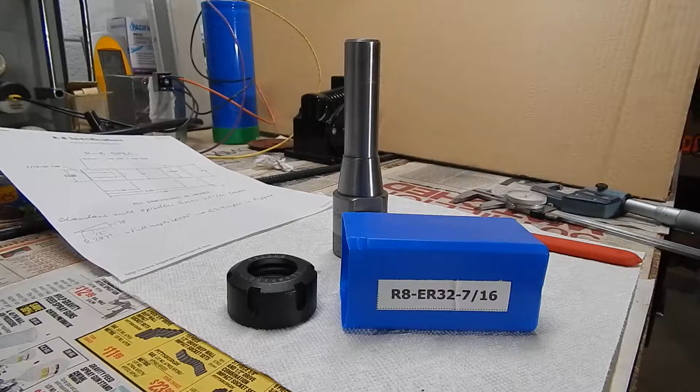Hello, this is a review of the Banggood ER32 collet holder with R8 shank. This is the package of it. 7/16 thread for the drawbar.

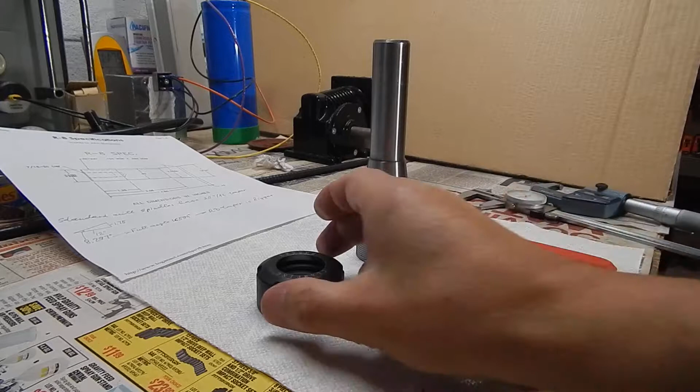The package included the holder itself, the nut, and a tightening wrench. There is nothing wrong with the wrench, it's pretty good. But let's talk about the collet and the nut. This is the collet holder and the nut itself.

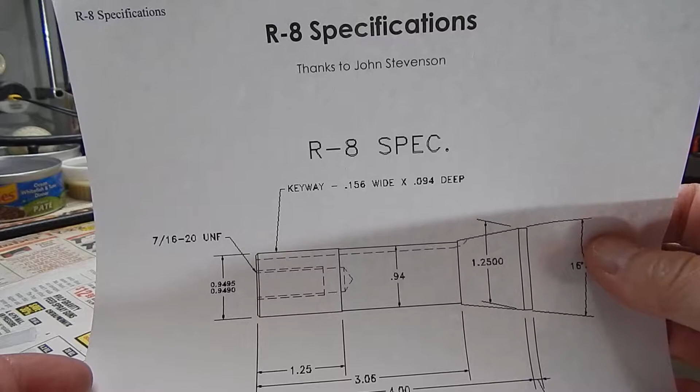There are a few specs which everybody is supposed to obey with. In this case, this is R8 specification for the shank itself. Let's check a few parameters in here. Very important one is the rear shank, which is supposed to be 0.9495 inches to 0.949 inches in diameter. Manufacturer spec gives only 0.0005 of an inch tolerance for this journal.

Let's see what we got. We're gonna use a Mitutoyo digital micrometer for this test. I'm gonna set it on 0 so you can see that the micrometer is set properly.

Okay, it's 0.5 off. Changes with temperature. Let's set it on 0 again. Okay, now it's 0.

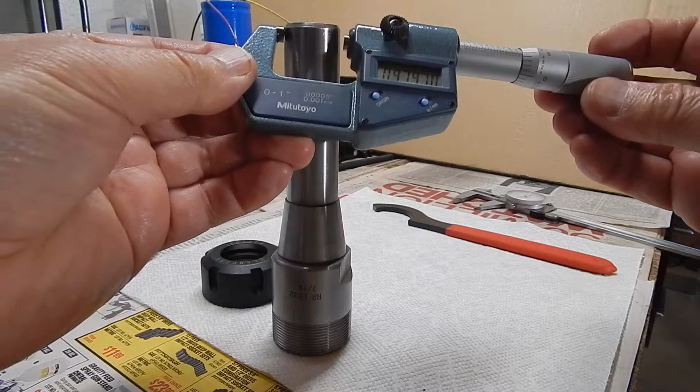Let's check the journal diameter. Trying to do it so you can see what's going on. It's difficult to do. We're gonna try. Hope you can see it.

0.946 thousandths in diameter. That is 0.003 of an inch below the spec tolerance. That is no good. It means this particular journal is going to be loose in the spindle, and the spindle will not hold it consistently.

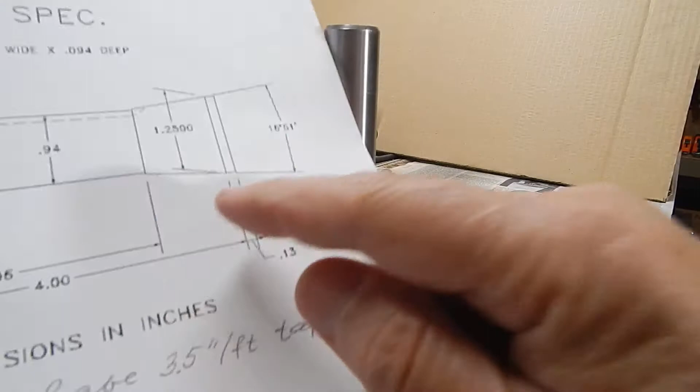Let's see what else we can check. How about this diameter on a drawing? 1.250 inches. It's not that critical, but let's see what we got.

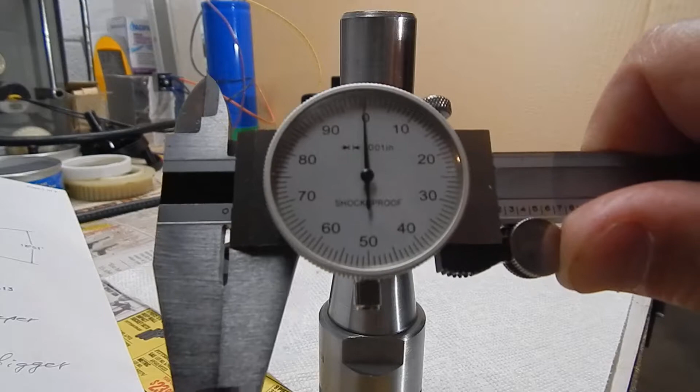I'm gonna use a dial caliper for this check. You see, it is set on 0 to begin with. Let's see what we got so you can see.

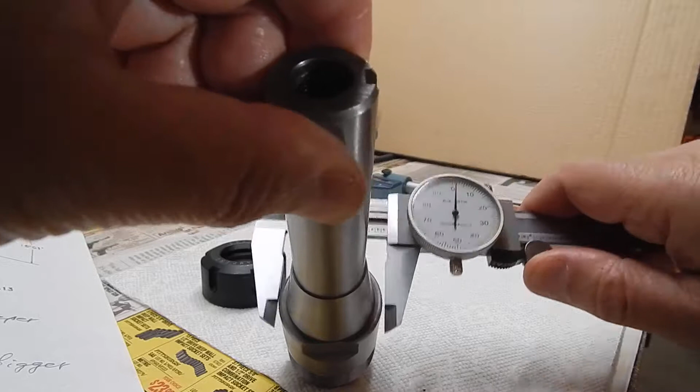.302. Well, there is 52 thousandths above the spec.

That means, I don't know if you can see it, I was putting it in a spindle end roughly right here. The taper is too big.

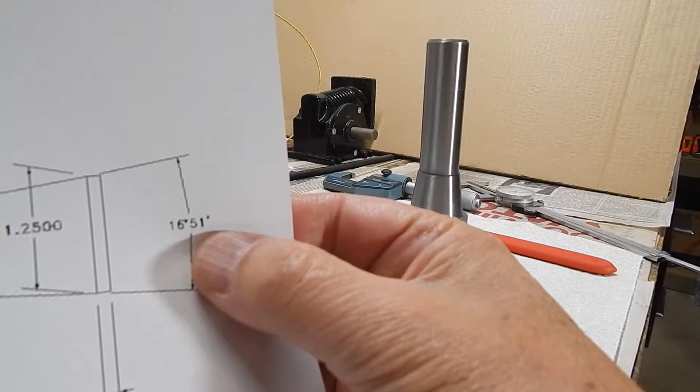There is one more big issue here. The taper contacts this holder only at the biggest diameter, meaning the taper angle is no good. The spec tells you what the angle is supposed to be: 16 degrees and 51 minutes.

I did not really measure how much we have here, but I checked it on paper. The angle is no good. It is bigger than it's supposed to be. I would not put such a holder in my brand new spindle. It will damage the spindle under any considerable load.

I did check it for run out as well, because run out of a tool in a collet holder is very important consideration. I was getting non-consistent readings on the run out of this taper when installed in my mill spindle. The spindle is good, by the way.

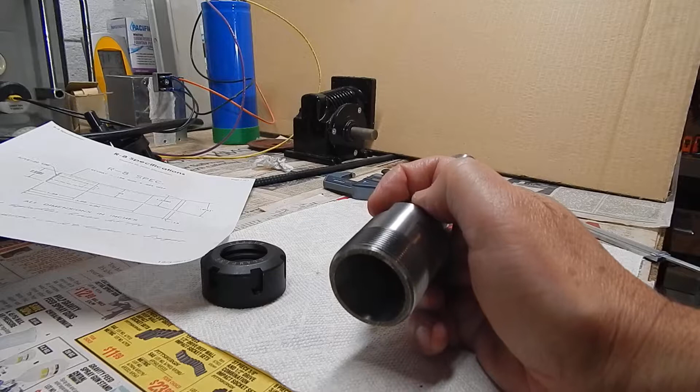With good tooling, it shows only a couple of tenths of run out on a tool. In this case, I was getting about 3 thousandths of run out along that taper, which is way too high, and it was not consistent because this diameter is undersized and the taper is not good, so it does not position itself consistently inside this mill spindle.

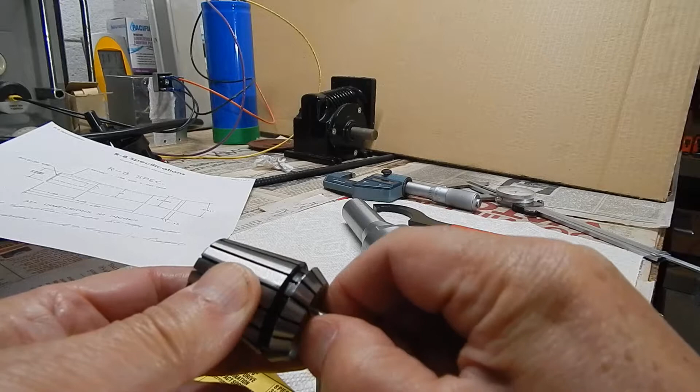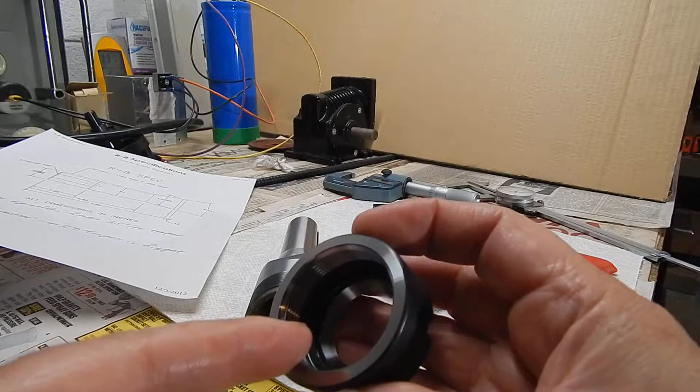It's odd because in terms of the threads and internal taper, the machining should be consistent, but if I see run out on the face, it means there is run out on the thread and there is run out on the taper.

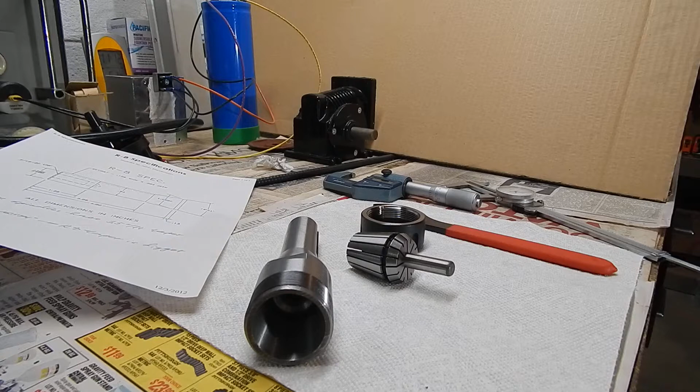No, I would not put this on my mill, then I could damage it. Thank you.